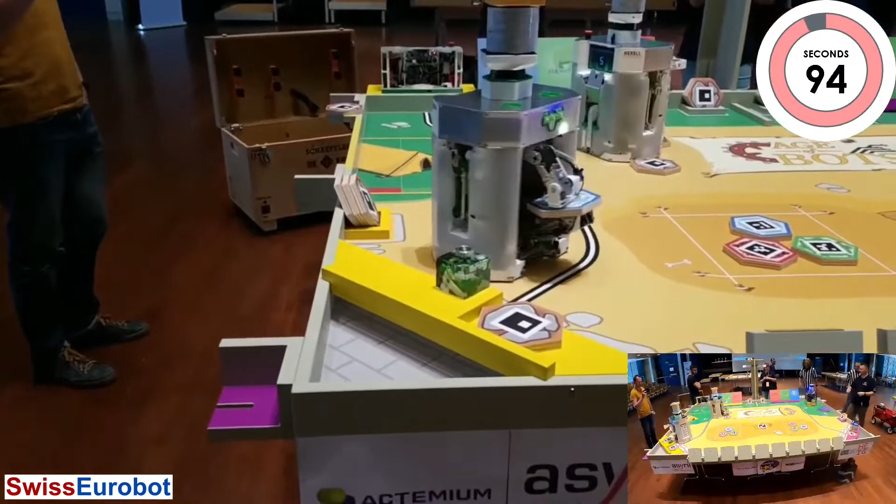Ah ben du coup, du côté de PM-Robotix, il a dit « Ah ben voilà, c'est parce qu'il est parti en jaune, c'est ça ?» Ah zut. So he has the program for the color yellow, but he was color purple. So he had to stop it because he was doing something wrong.

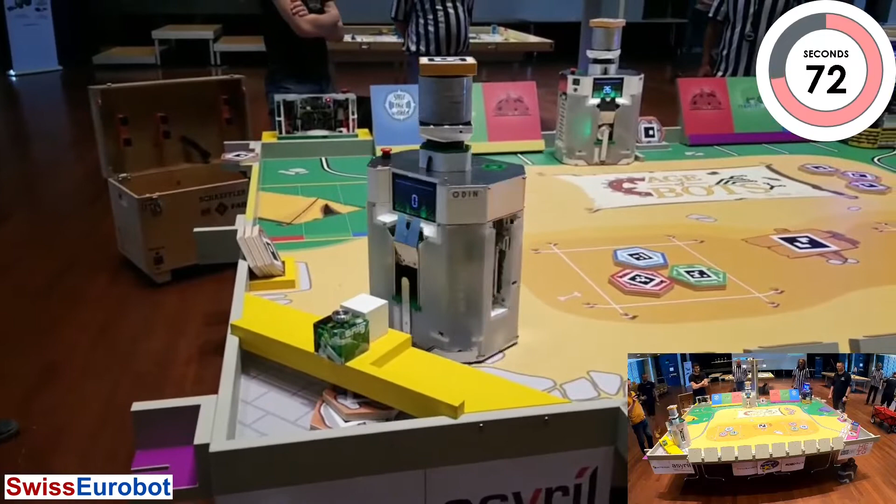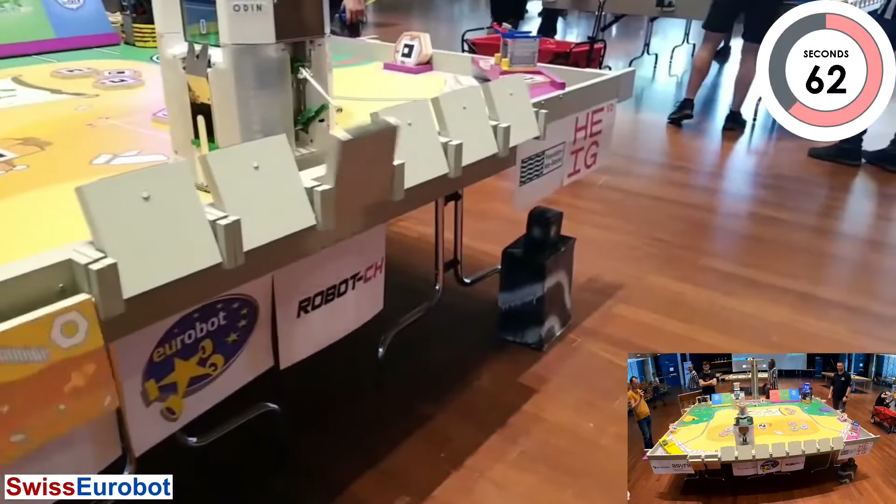Donc on peut voir de ce côté que ça travaille bien, les deux robots sont là. Il y a le cube qui a été placé, la réplique, mais la statue n'a pas été prise de ce côté. Oui, j'ai pas vu, du coup il l'a poussé. Exactement. Puis il l'a posé l'autre.

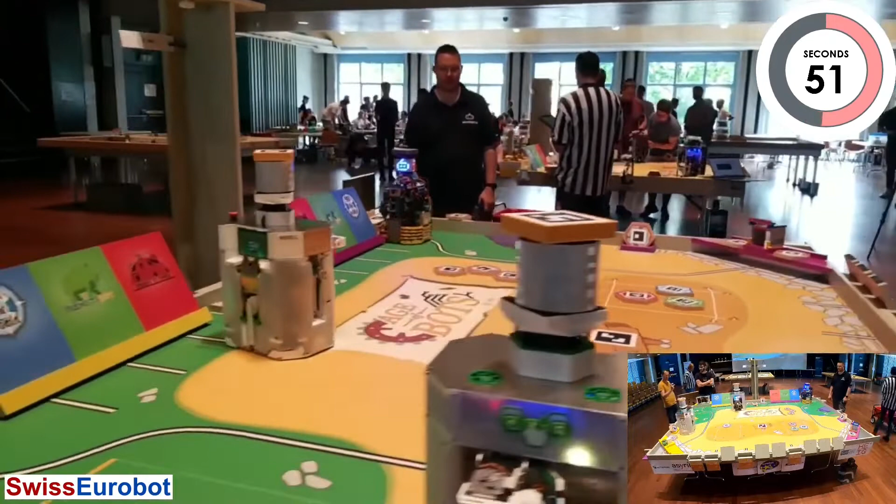Alors là, il faut se méfier s'il y a des samples qui viennent entre le robot et la table, ça peut complètement déstabiliser le robot, mais là ça a l'air bon. So as you can see, he's taking the samples from the dispenser. And if he takes everything outside of the dispenser, he will get more points.

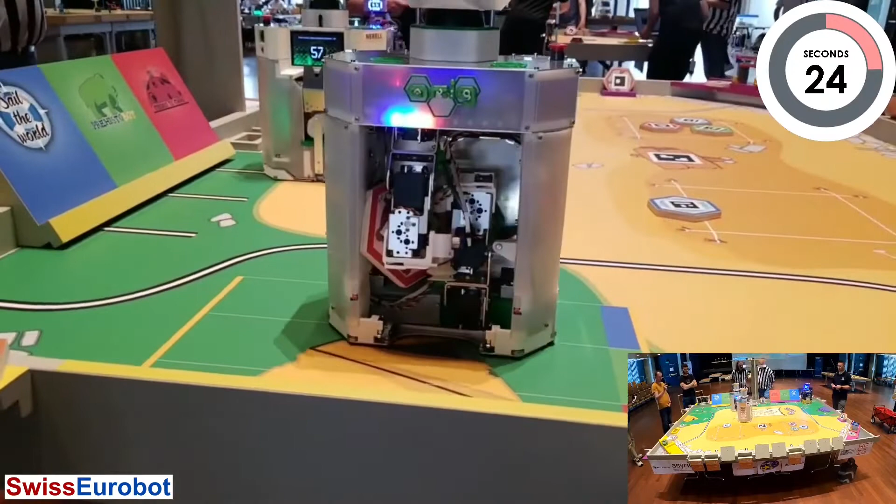Je crois qu'il a voulu les déposer, mais ça n'a pas marché. Est-ce qu'il va retenter? Retenter. En tout cas, se restabiliser contre la table. Et voilà, il les dépose.

Et donc là, on voit que la ventouse n'arrive pas à attraper le sample à l'intérieur du robot. Il a essayé vraiment plusieurs fois, beaucoup plus de fois qu'il y a de samples. Donc on voit qu'il y a un test, mais du coup non. Pas réussi à les sortir. Il y en a 2 qui sont bloqués dans le robot et ça ne comptera pas.

Perfect, and it's the end of the match. Bien joué, on peut applaudir les 2 équipes s'il vous plaît.

So as you can see on the table, the 2 robots have been back to the excavation area. So basically they can go back to the excavation area or the base camp. And if they have to be 2 robots in the same area to score 20 points. And actually they did, so perfect.

Donc si à la fin du temps, les 2 robots sont dans une des zones, soit la zone de fouille, soit le campement, ils font 20 points de plus. Puis s'il y en a un qui n'est pas dedans, c'est 0 points, c'est ça. Et donc ils n'ont pas besoin d'être entièrement dans la zone, on voit bien, de toute façon elle n'est pas assez grande. Donc c'est la projection verticale d'un robot qui compte.

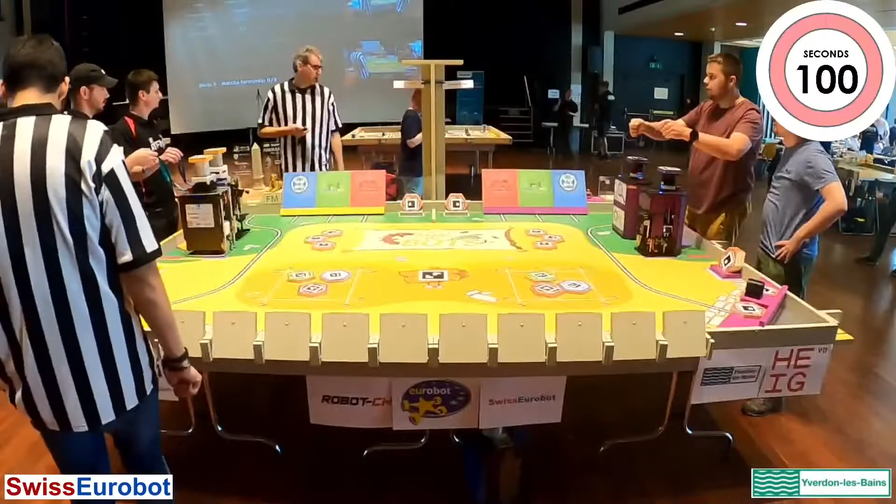So now we're letting that table for the points, they're going to count for the referee. And we're going to table B. We have here 2 teams preparing: RTFM coming from Fribourg and Origin Scout Troop, 2 Swiss teams. I think we are ready to go.

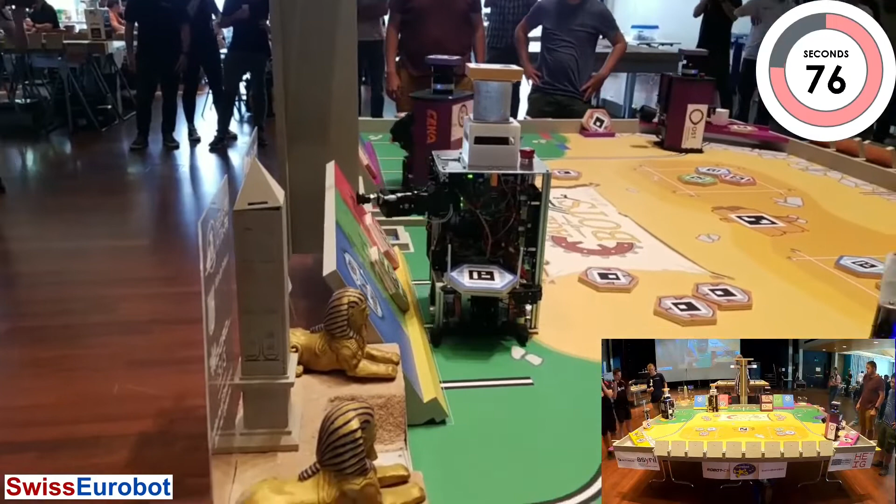So as you can see on RTFM side, they're displaying the samples on the good side, with the colors, and actually in the good spot, so they're going to mark 6 points for each sample.

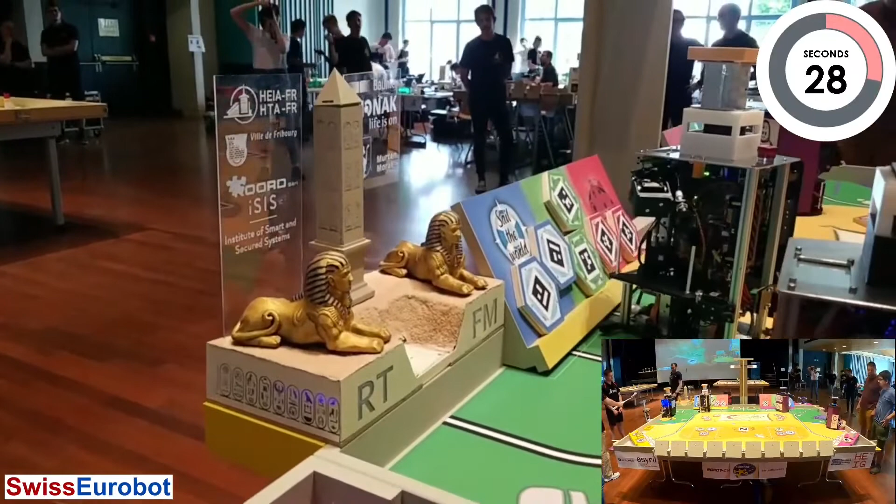Ok, yeah. One of the robots has stopped, but he's actually in the campsite, so...

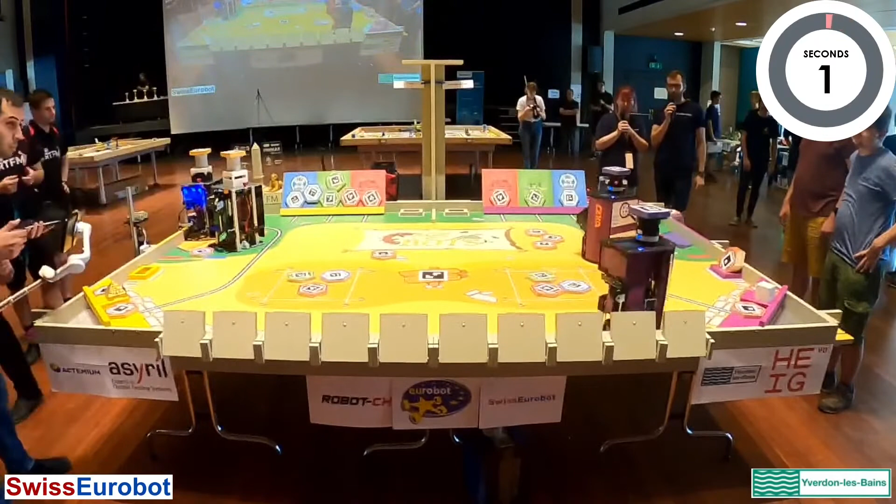We can also see that on Origin Scout Troop side, they have displayed their little statuette on the display, and the light is on, so everything good for that. And they also have the replica on the other side.

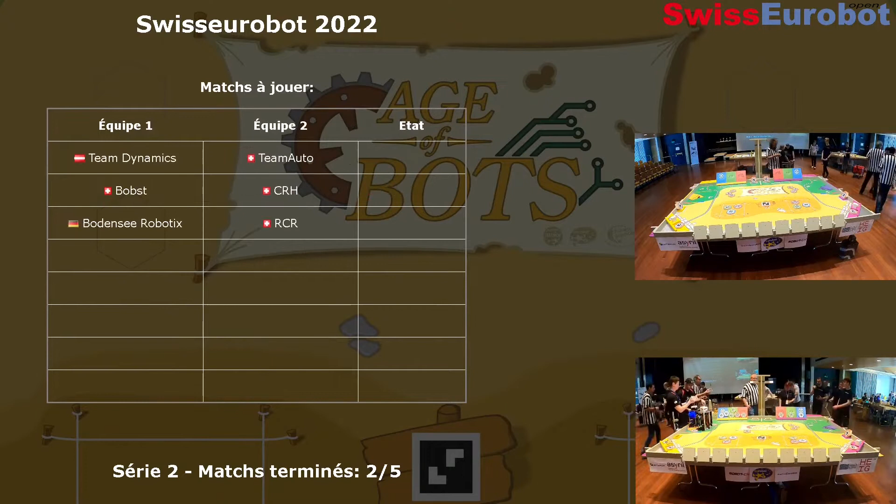Yeah, so in Germany they don't have any championship for robotics as well, so the 3 teams are directly going to France against all the European teams.

Oui, c'est ça. Donc en fait, on qualifie automatiquement tous les pays qui ont 3 équipes ou moins, ils vont directement en finale. Et si vous avez 4 équipes, il faut organiser des qualifications internes. Mais je crois qu'on a un score.

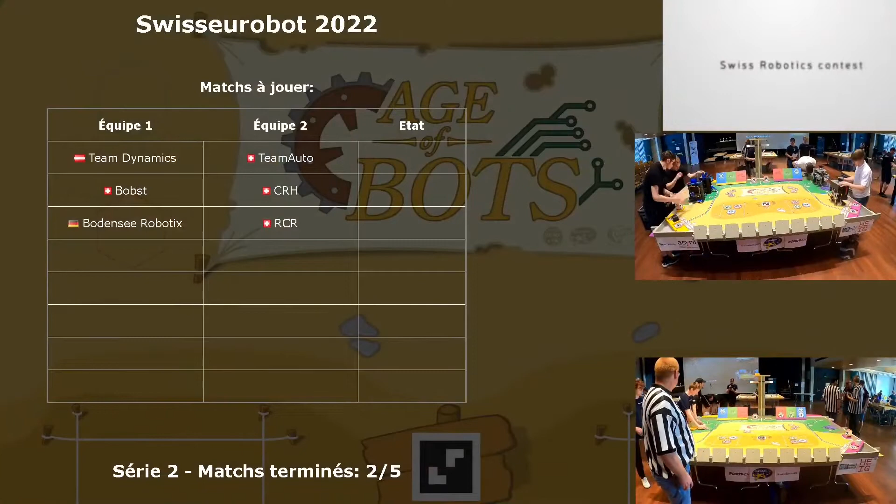Yes, we have the score for table B. Origin Scout Troop did 46 points and RTFM coming from Fribourg 89. So victoire RTFM à 89 points contre 46 pour Origin Scout Troop.

Donc là se prépare Team Auto en violet et Team Dynamics en jaune. So on table A, preparing, we have 2 teams, one coming from Austria on the yellow side, Team Dynamics, and Team Auto on the purple side from Switzerland.

On a même les supporters des arbitres dans le public. Très très fair play, c'est très bien.

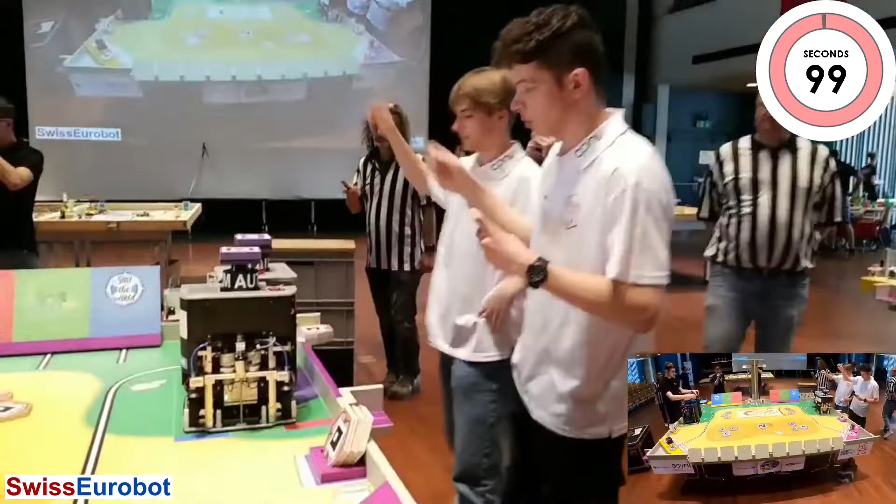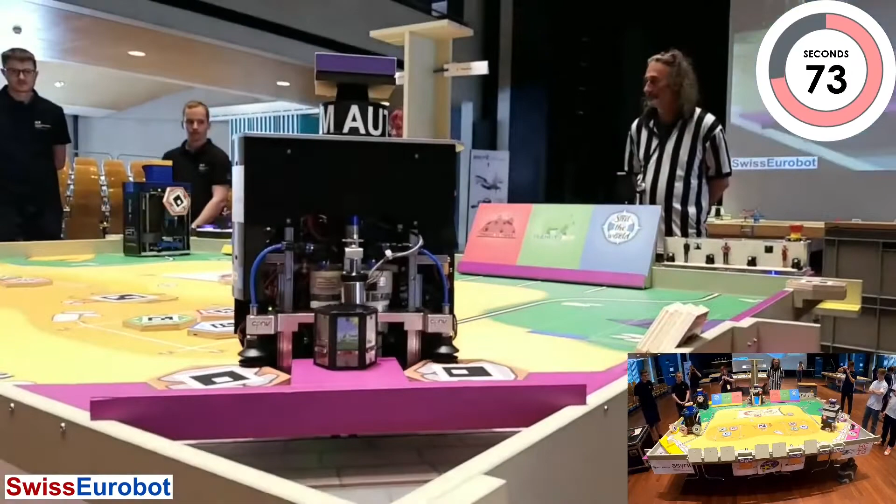So we are flipping the excavation squares. Et là, du coup, on sent. So on Team Dynamics side, we have flipped the replica and the statue perfectly. We have the little mermaids dancing. Everything is good on that side.

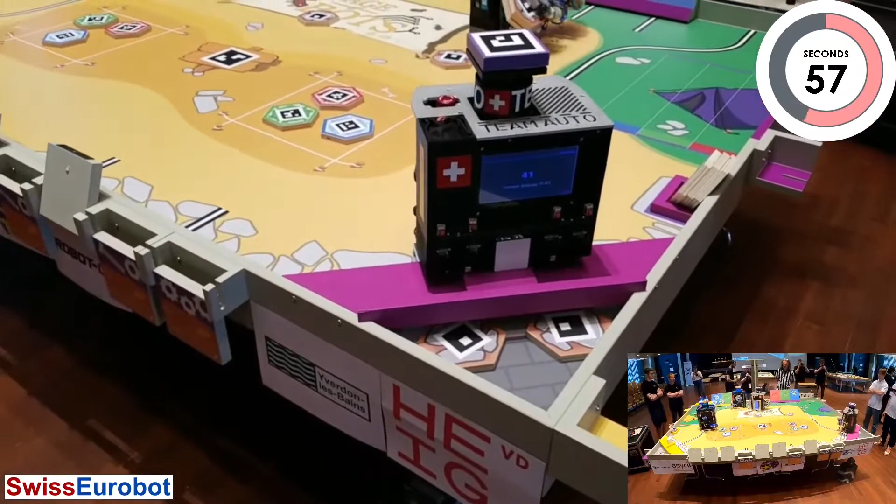Et on est en train de mettre les samples sur la galerie. On les retourne. Ah, petit souci avec les pompes. Ah ouais, je crois qu'il y a un des bras qui n'est pas rentré ici et ça a posé problème. Du côté de TeamAuto, c'est bon pour la statuette.

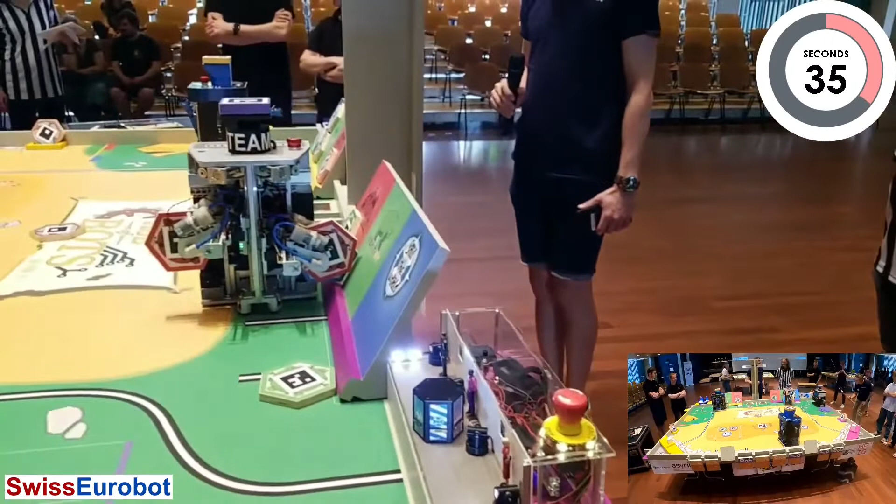Comme tout à l'heure, du côté de TeamAuto, ce n'est pas directement mis comme il faut dans la galerie sur les bonnes couleurs, mais il me semble qu'après il les range à la fin. Par contre, il y en a quand même un qui a glissé. Il y a un élément qui est venu juste par terre devant et je ne sais pas si ça va embêter le robot.

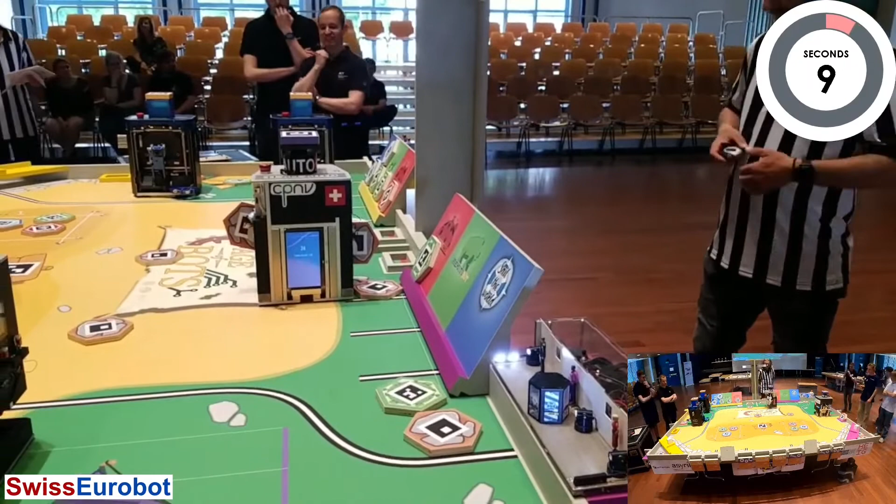On va voir, il reste 10 secondes. So we have 7 seconds left. Robots need to go back to the camp. And I think we are good to go. Et c'est la fin du match.

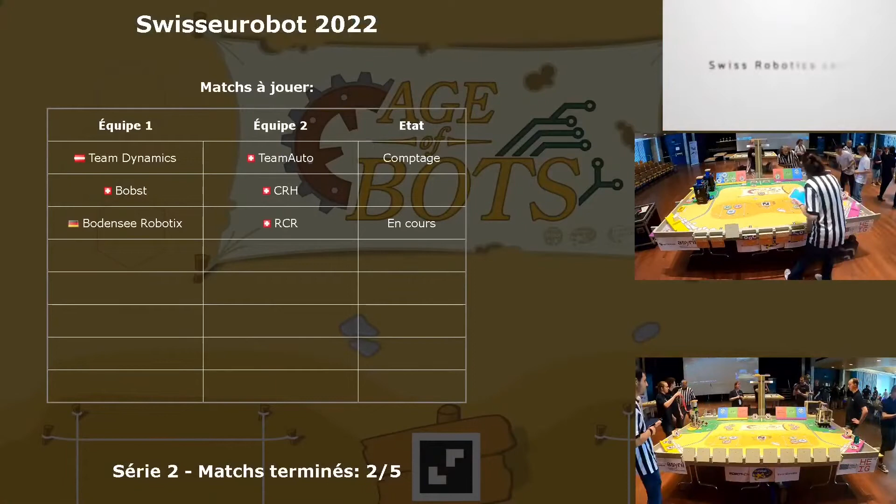On est prêt. Donc je vais lancer le compte à rebours pour la table numéro B. 5, 4, 3, 2, 1. C'est parti. On n'a que 2 robots ici, donc un pour RCR et un pour Bodensee Robotix.

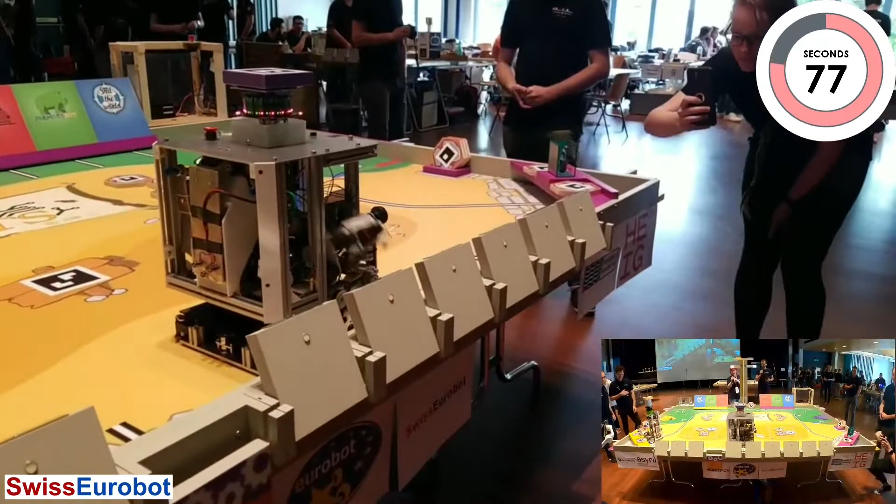So as we can see, he tried to flip the tile. He did it perfectly, good job. And on the other side, he's trying to take the statuette, put the replica. Let's hope it will work.

Donc en chemin, pendant qu'on est en train de faire ça, on balance quelques petits samples.

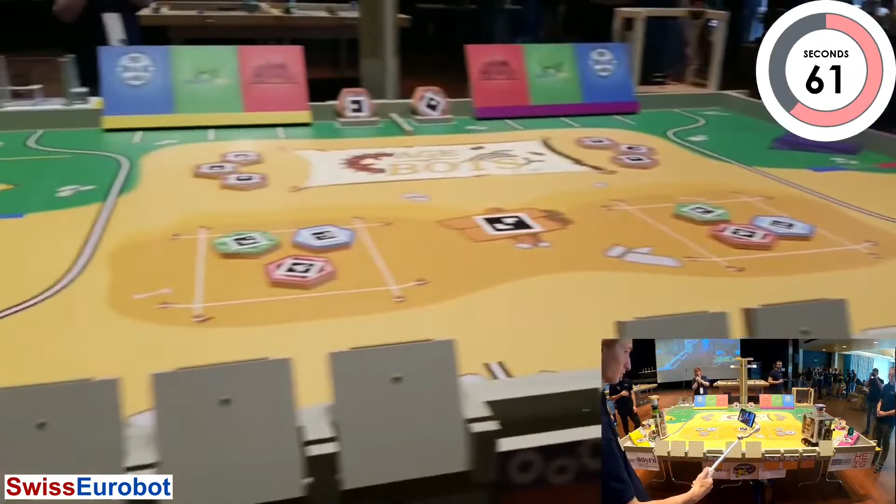Et donc moi j'aime beaucoup la statuette de Bodensee Robotix parce qu'ils ont le petit companion cube de... ça m'échappe maintenant. Portal, Portal, merci.

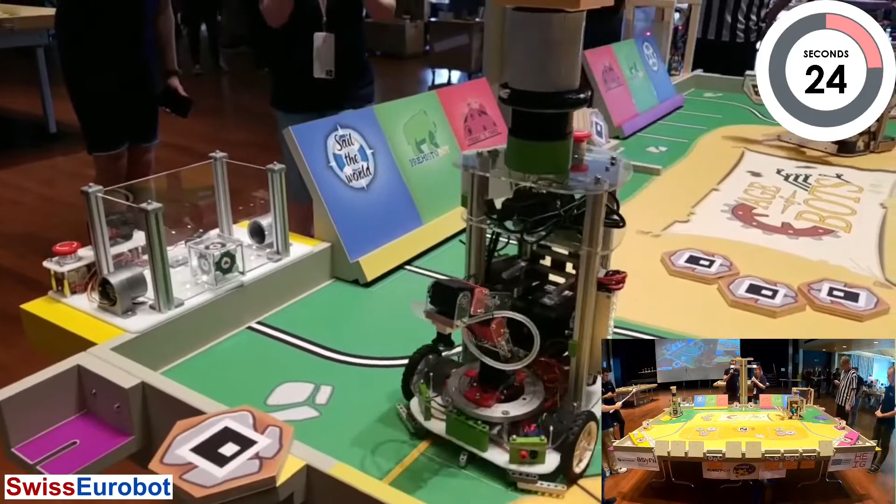RCR, c'est bon, on la balance, c'est pas très grave, mais c'est dedans. Je pense que c'est complètement à l'intérieur, donc c'est validé. But on Bodensee Robotix, it's not totally on the display, sadly.

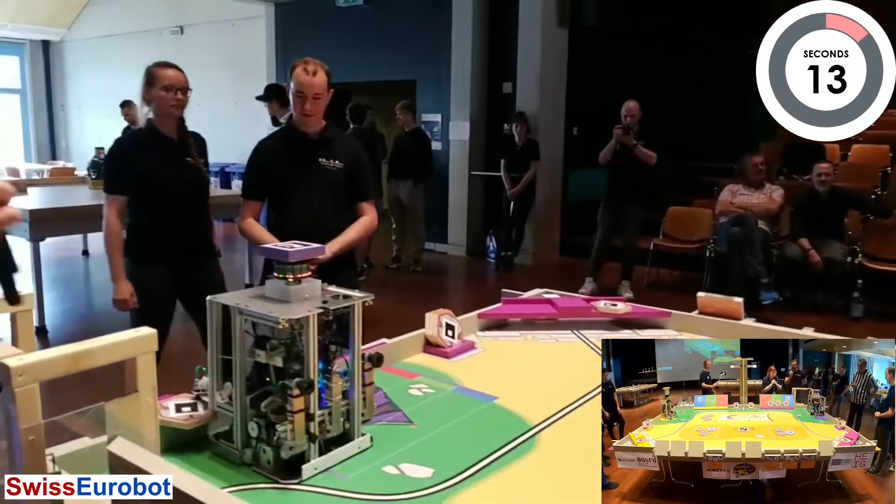So as you can see on RCR side, they have put the sample on the display, but on the wrong side. We can't see the colors, so they will have less points for that.

Et il reste 3 secondes et les robots se sont arrêtés déjà, donc je pense qu'ils ont fait ce qu'ils voulaient. Voilà, on peut les applaudir bien fort. Bien joué, good job guys.

So, did we announce the score, this score? I'm not sure. Yes, we did. Okay, yes we did. On peut le redire just in case, si on n'est pas sûr.

Donc tout à l'heure, on a eu Origin Scout Troop qui a rencontré RTFM. Et donc c'est une victoire 89 à 46 pour RTFM. Good job to RTFM who won 89 points to 46 against Origin Scout Troop.

We remember that it doesn't really count who wins now the round. It's just the total of the points at the end of all rounds that will count.

Donc là, on a des comptages en cours sur les 2 tables parce qu'on est allé très vite à la deuxième table, donc on va les laisser finir. Mais on a déjà plein d'équipes toutes prêtes là-bas pour aller jouer. Et du coup, les prochains matchs, des fois c'est affiché à l'écran, on verra.

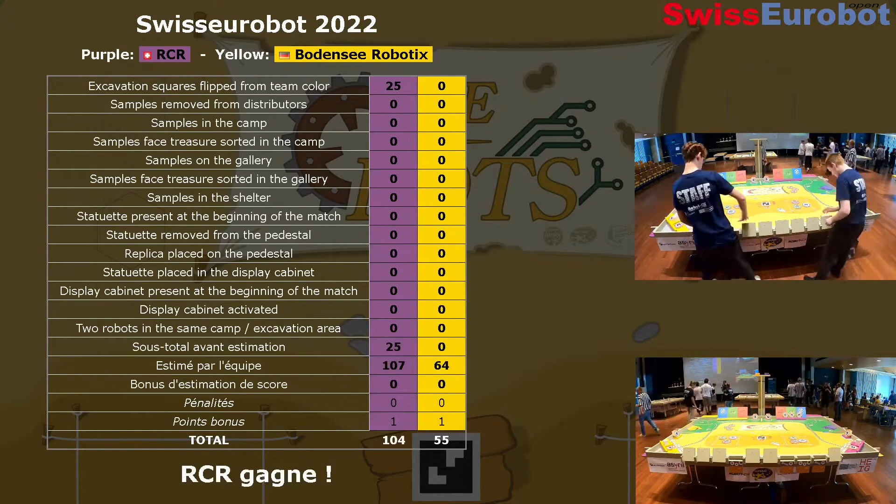Et donc là, on a CRH qui va rencontrer Bobst ici sur la table A. So preparing on table A, we have CRH coming from Switzerland and Bobst coming as well from Switzerland.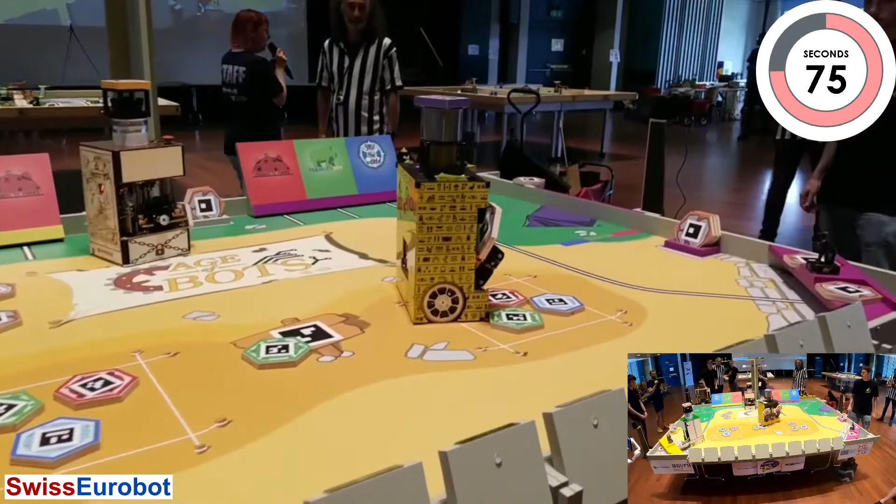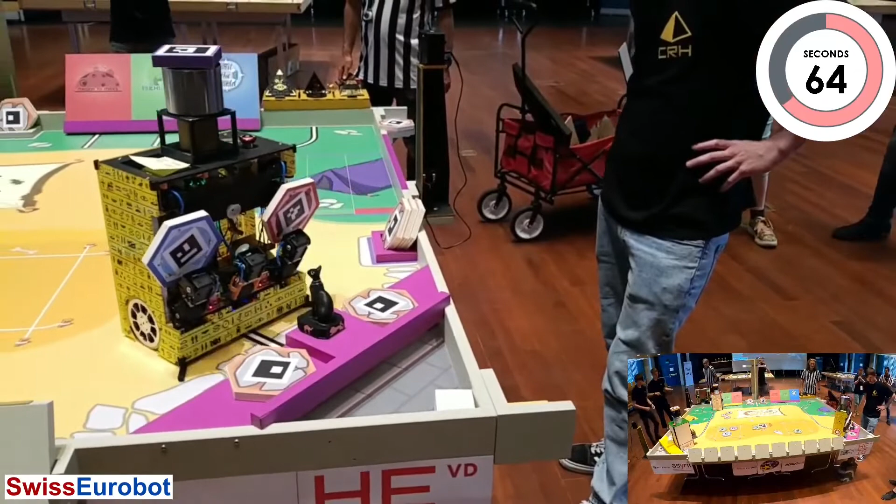Ah, petit souci quand même, on a lâché un échantillon ici du côté d'Yverdon. Et du côté de Bobst, on a récupéré la statuette et posé la réplique parfaitement sur la zone, donc c'est parfait.

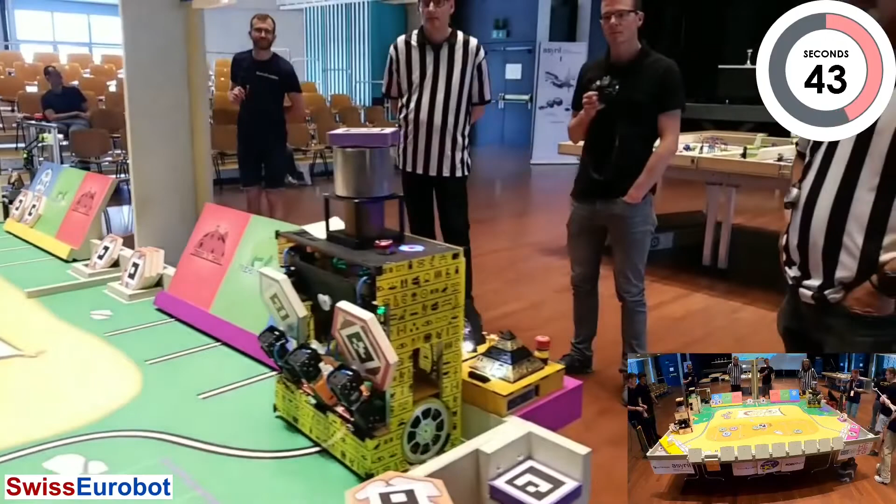Alors ici, on récupère la statuette. La déesse Bastet. Oh non, ils ont remarqué qu'ils ont oublié de mettre le cube de la réplique, malheureusement. Du coup, voilà, mais on voit que la jolie statuette tourne.

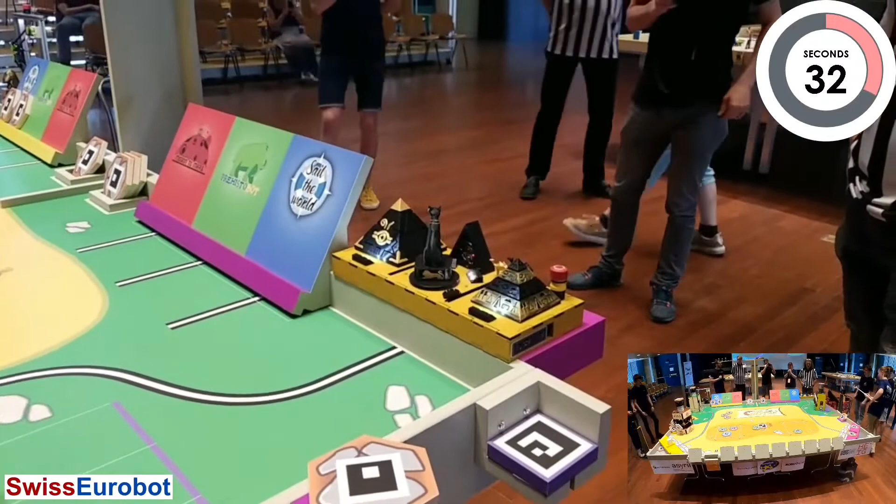Et tout le monde est content ici, en tout cas. Magnifique. Bastet tourne au milieu des pyramides. Et là, c'est très joli aussi.

Yeah, we can see also on Bobst's side, like we have small carts going up and down. Beautiful. Small mining carts, yeah. And we have a light in the head, in the eyes of the figurine.

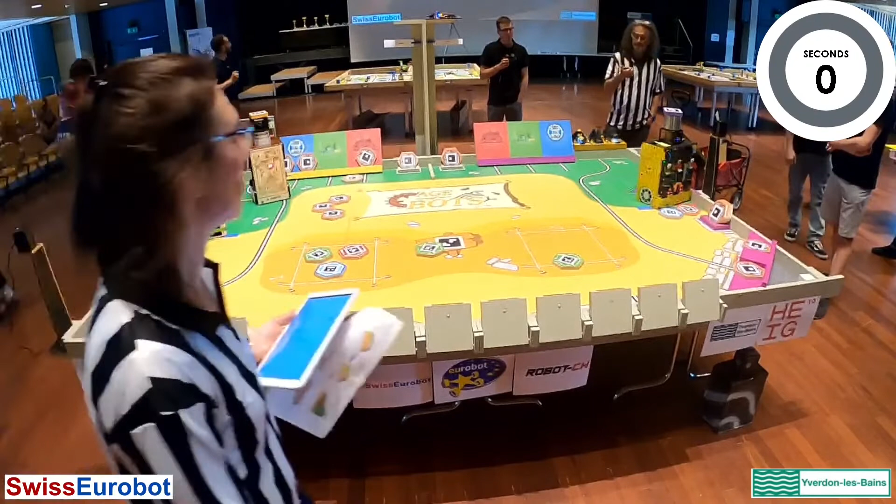Alors, il reste 10 secondes. Les robots vont retourner dans leur zone de départ. Donc là, c'est bon, ils sont tous retournés. Both robots are back in the starting areas, so they will score points. Et c'est fini. On peut les applaudir bien fort.

Donc, on va encore attendre le score ici, mais on vous rappelle que vous pourrez faire des essais sur les tables jusqu'à 16h35. So we're just waiting for the score of the final match for this round. We just remember that the next round will be at 4:45, right? Yes, 4:45, and you will have until 4:35 to do your tests and use the tables.

Okay, so we have the last score for the round. Bobst did 105 points, and CRH for their first match today, they did 59 points. Good job to them. I think that's what they envisioned to do. Donc 59 points pour CRH, c'est ce qu'ils avaient prédit qu'ils allaient faire, c'est très proche de leur estimation. Et 105 pour Bobst. Félicitations.